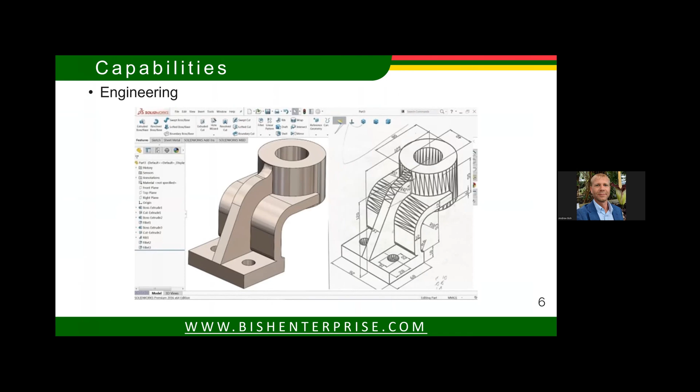We do 3D engineering or 3D design work using SolidWorks, and our engineering team works with that software. A lot of that is done in-house.

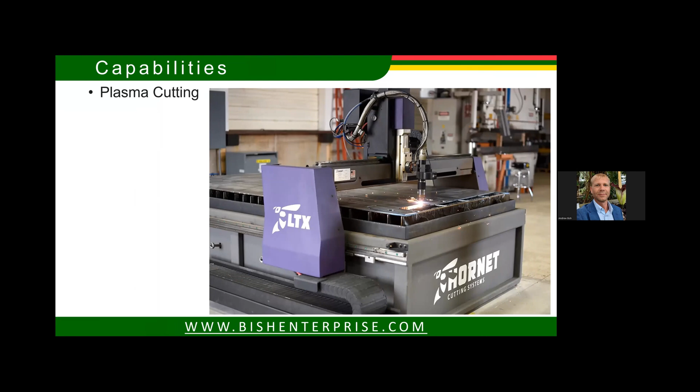We are capable of doing any type of plasma cutting. We've also got local laser cutting services.

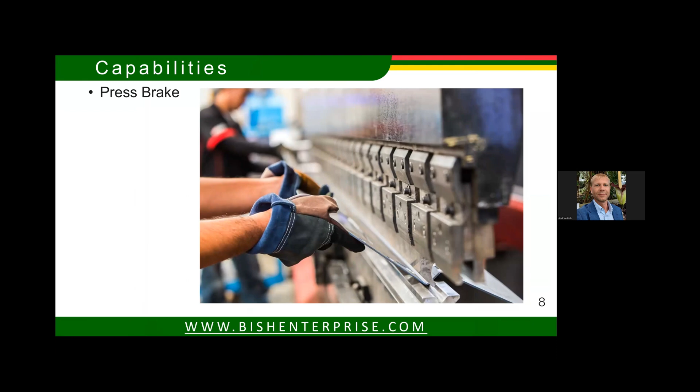We bend our own parts. We work a lot with steel, aluminum, a lot of sheet metal and tubing are our specialties. Agricultural components are oftentimes built with tubing and sheet metal. We have our own team of fabricators and welders and assembly team members.

So what do we do for products? We're most known for our header adapters. I'll show you some of these items here in just a little bit, as well as some of our other products. We'll just get into some videos.

So header adapters, this is really what started our company. My grandfather saw a need out there to reduce the entry cost to farmers wanting to upgrade a combine and not necessarily wanting to upgrade their header. Now I realize that some of this equipment is larger scale than what some of the conversations we're having on this call are, but I think that when we look at what we do as a company, this adaptation is a relatively simple item that helps customers, helps farmers specifically be able to more affordably harvest their crops.

And it does seem like there is, from at least the dialogue we've heard today, some opportunity there. The adapters to me just symbolize our ability to make different components work together. And I think when we're thinking about how do we get different manufacturers and different products that are in the marketplace to play nicely together, we definitely have the ability to source some of that out.

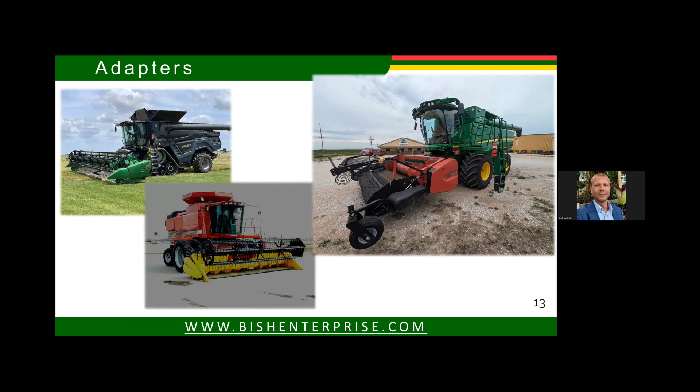Here's some other adapters that we make. So if you ever see, if you're in the United States and you ever happen to see any crop videos where there's different color headers on different combines, we likely made the component for that.

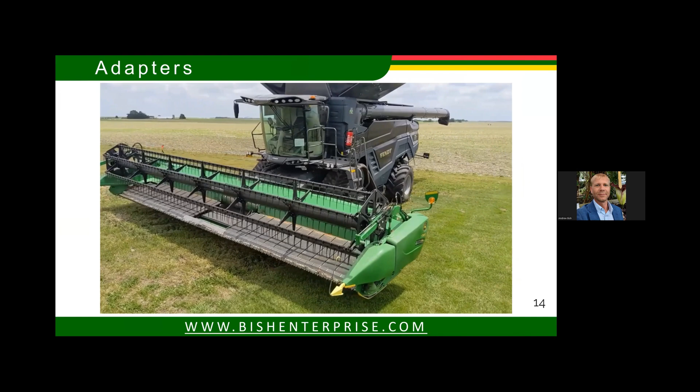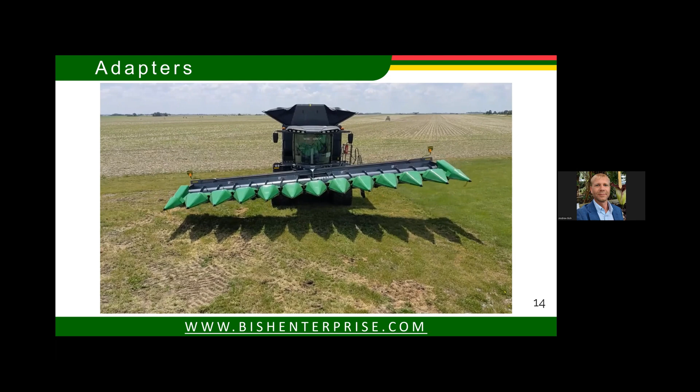Here's just a short video of one of the products that we put together a few years ago for the AGCO Corporation. You can see from the background we are in farm country. There happened to be a sprayer running in the background of that one, the snippet just a minute ago.

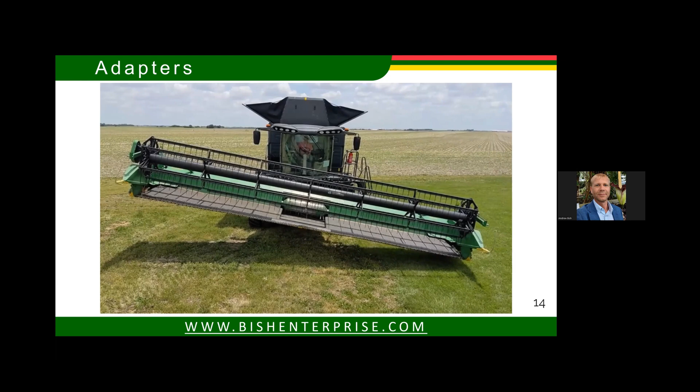So sorghum, this is, I guess, what brought Nate and I together. We happened to develop a specialty header specifically for the harvesting of sorghum. It is called our super crop header.

This header was designed to more efficiently harvest sorghum in some of the drier parts of the United States. A lot of the research that went into this header was done in eastern Colorado and western Kansas, where there are some severe drought conditions that have been ongoing for long periods of time.

One of the challenges we were trying to solve when we developed this particular header for sorghum was that, at least in the United States, a lot of our varieties tend to fall down during the harvest period or before the harvest period and end up on the ground.

We wanted an efficient way to pick the material up without bringing all of the material into the combine, so that we put less workload onto the combine, use less fuel, but also capture that material that would otherwise be lost as a result of the weather situation.

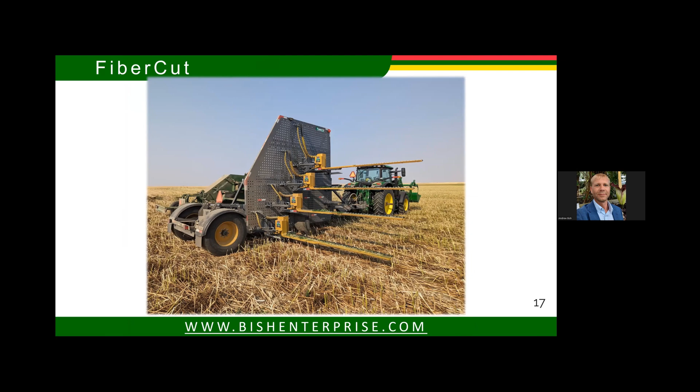This is another product that we innovated, developed out. This was for actually one of our specialty crop customers that works in hemp.

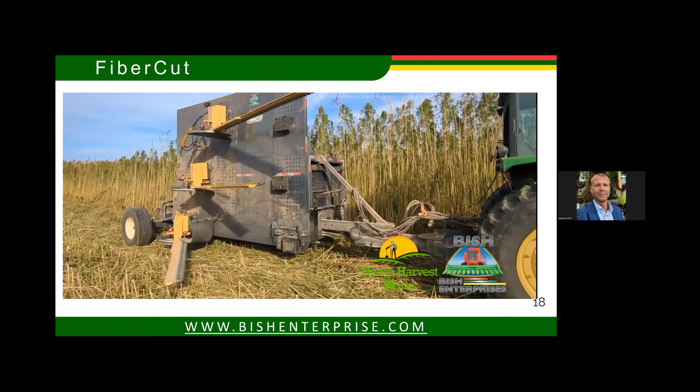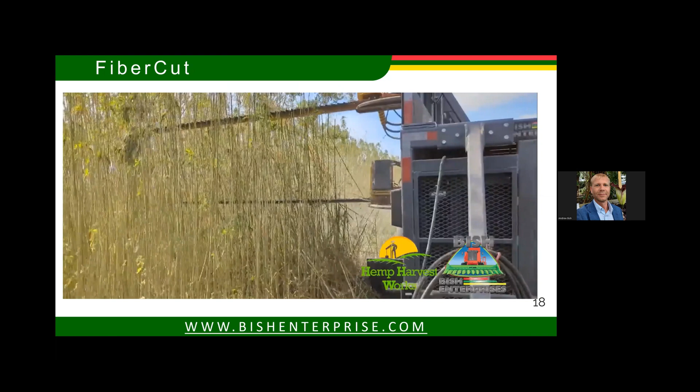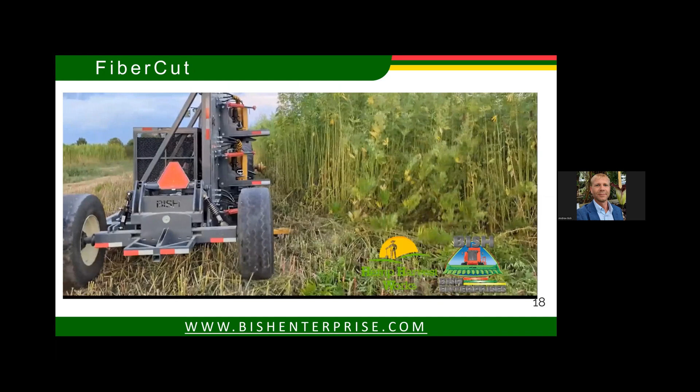We wanted, we were working to identify a way to make it easier for farmers that had traditional raking and baling equipment to be able to cut down the hemp plants, the stalk. These are customers that are harvesting for stalk material. We wanted an easier way for them to be able to rake and bale that using the existing equipment that they already have on site.

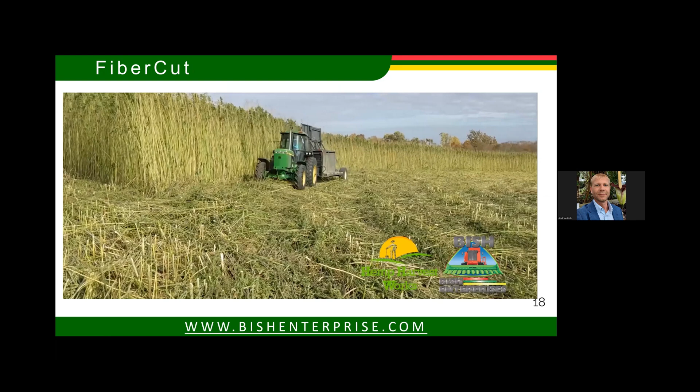So we ended up developing this multi-level sickle mower system. Pretty simple technology, old technology. Sickles have been around for a long period of time. But the way that we configured it allowed it to work for a more efficient harvesting system. So we are very familiar with working not only with new technologies, but older technologies and how to apply those to today's needs.

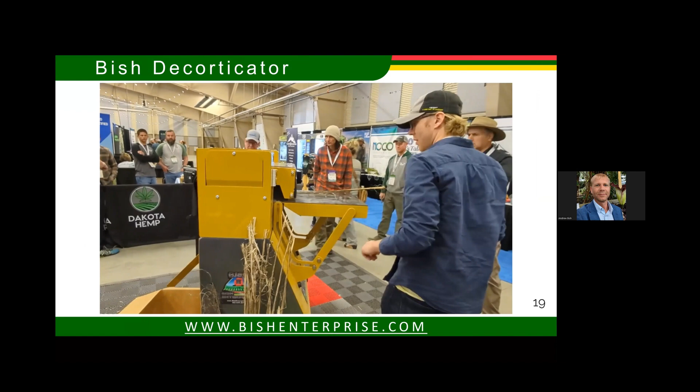This is an example of a smaller scale piece of equipment that we've developed. This is a research scale decortication unit. It actually takes stalks, specifically currently of hemp or kenaf plants, and it can separate out the bast fibers from that stalk material, separating out the hurd or the woody material from those bast fibers.

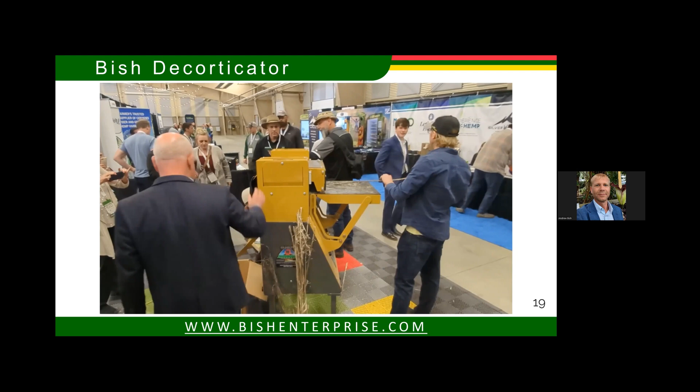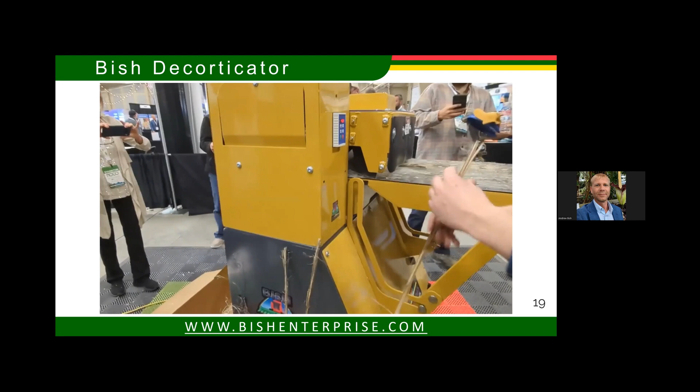This machine was really designed for universities in the United States, where they're doing small scale plots, trying to understand the different ratios of what is inside of the stalk itself.

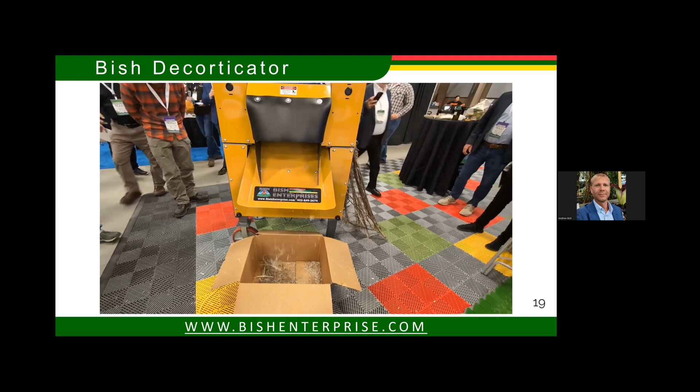A machine like this could easily be used for a small grower as well. That's actually something we're working on right now, modifying the unit to work more efficiently for a smaller grower instead of a university setting. That's just an example of some of the smaller equipment we're fully capable of building, as most of what I've shown before is pretty large scale.

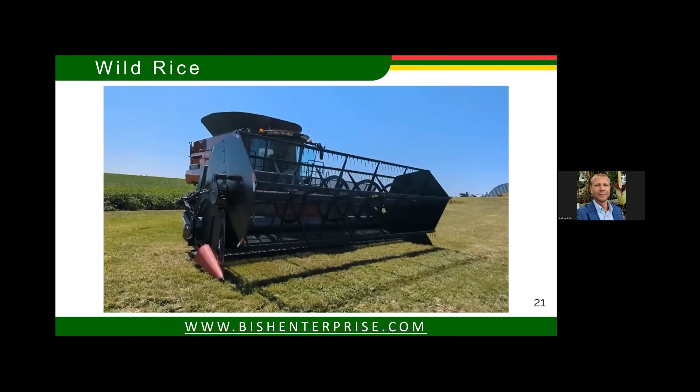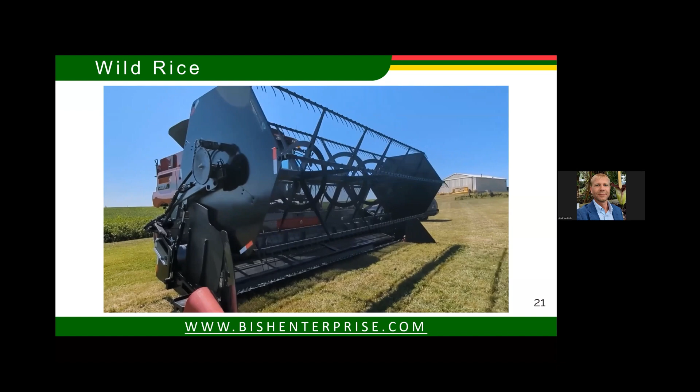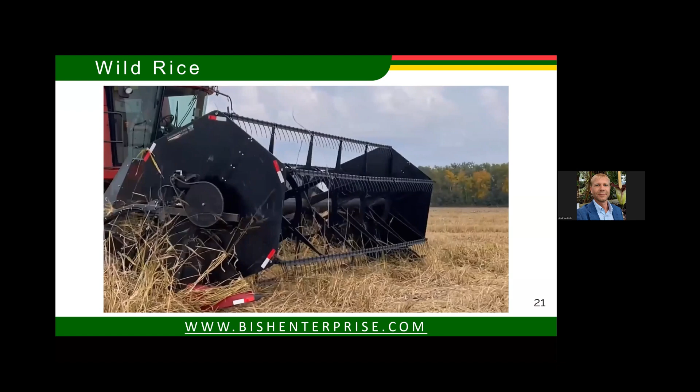This header here was designed for the wild rice industry. We've got another one going into production right now. This is a specially designed header with an extremely large reel, over 100 inches in diameter. There aren't any other headers on the marketplace with such a large reel. We're trying to solve some of the challenges these producers are having when harvesting wild rice.

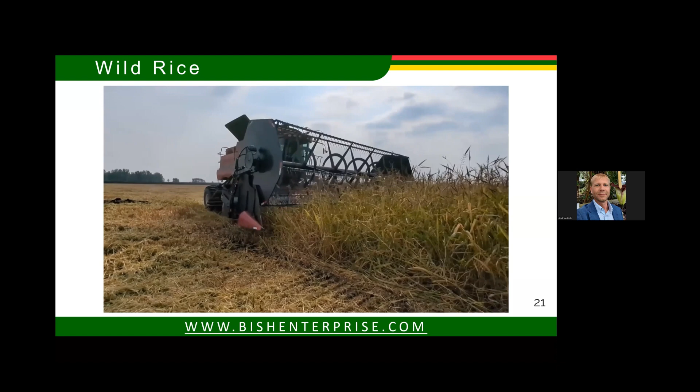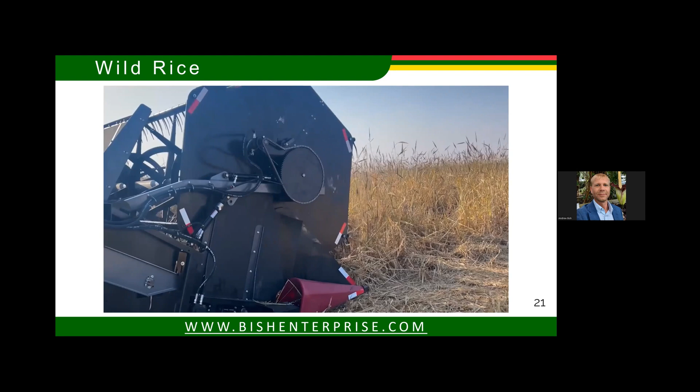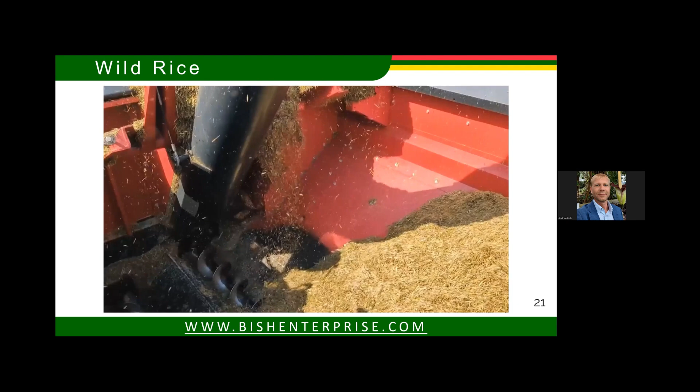Wild rice is also a crop that tends to fall over. About 30 to 40% of the crop is often laying over in the field when the producer harvests it. Wild rice also shatters very easily—it's a wild crop, so they haven't bred shatter resistance into it. The oversized reel allows us to stay above the seed head when harvesting at very low points, reducing the amount of shatter that occurs with that plant.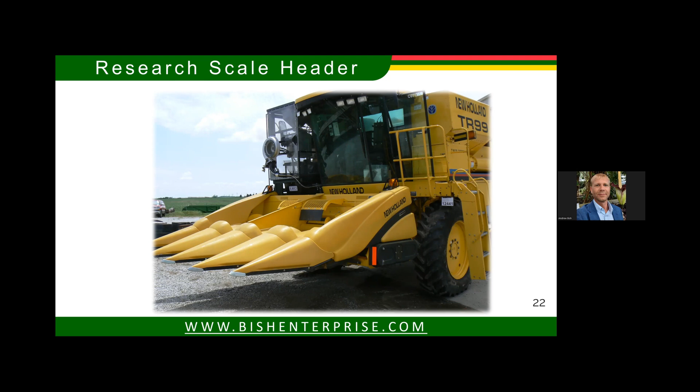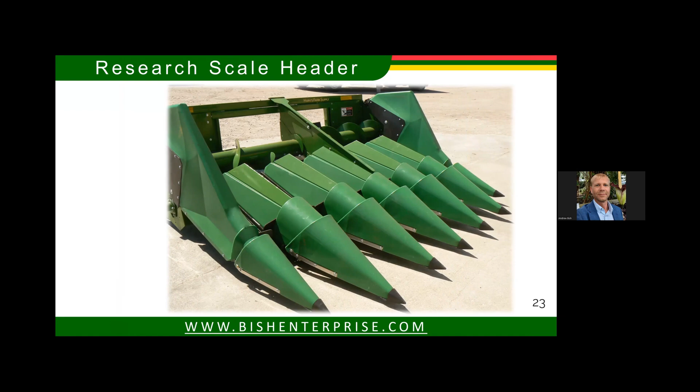When we get into some smaller equipment, we do a lot of work with researchers throughout the United States and seed companies—most of the seed in the world is created by some of these companies, and these lend into some of our smaller headers. So we've got 2, 3, 4, 5-row, and 6-row headers we've designed for this purpose that could potentially work well in locations that have small scale equipment.

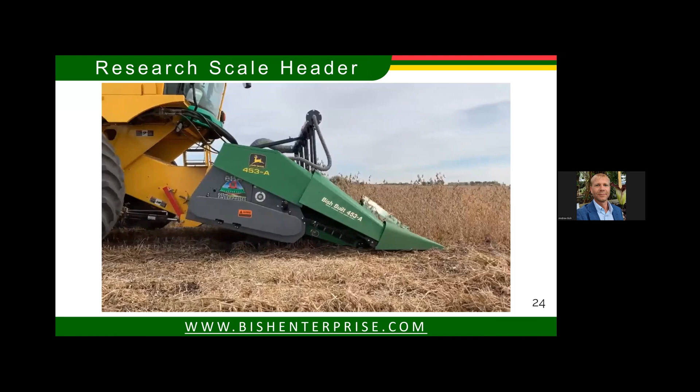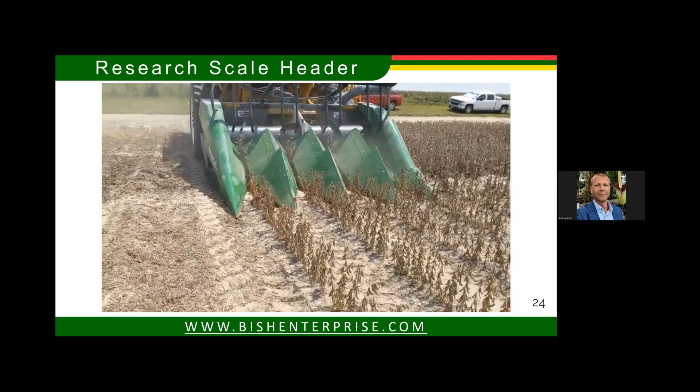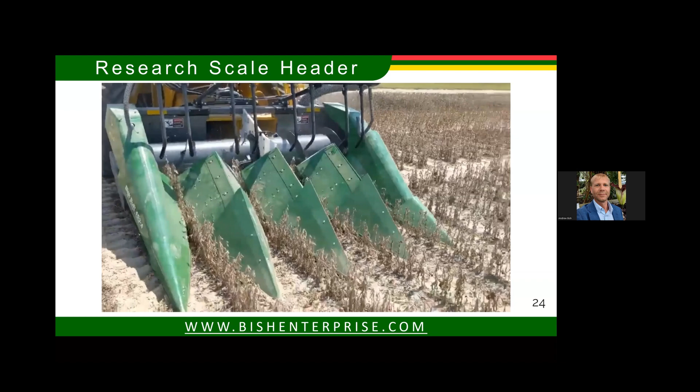Even these videos here, this combine is larger than what we'd be seeing in a lot of areas, but they're just examples of the ability to take large scale equipment and scale it down so it can be used in a smaller setting, while still achieving some of the efficiencies of the larger scale style equipment.

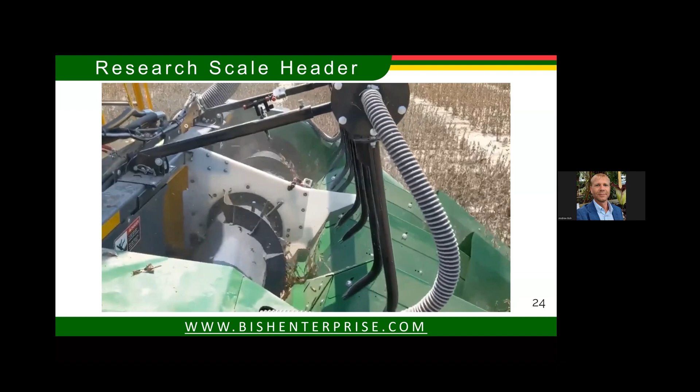Just another example, a small plot combine. These combines you're seeing in the videos are much smaller than what a typical person in the United States would use for production purposes. But I have seen similar sized combines in places like India.

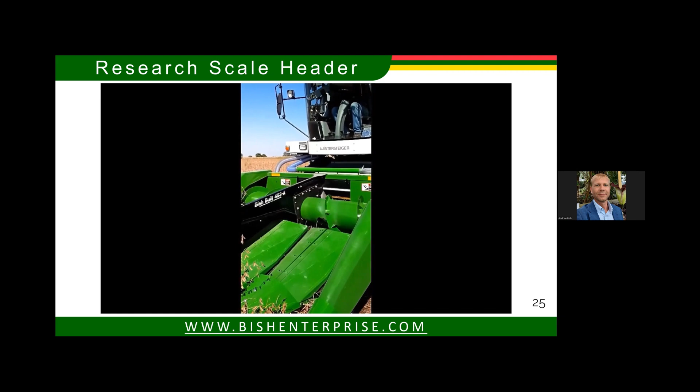And that's a little bit about what we do. So let me stop sharing here, and we'll get back to—let me see if I can show my video now.

While you're doing that, Andrew, looks like we have a couple of questions in the chat, but I also want to make sure we have time for you and Eric to have a healthy interchange. I'm really excited because it sounds like he's doing some really cool things, and I know you're doing some really cool things too. I love putting two engineers together and just sitting back and watching. But before we do that, Michael Snow asked just how far you can scale your work down, and he wanted some clarification on the Wintersteiger combine as far as cost—is it $70,000 or more? If you can address those things, Andrew, then it'll be time to take the pin out of it.

I think that's a great question about what the costs of those machines are, and the reality is a lot of those combines are still out of reach for a lot of producers out there. That Wintersteiger combine right there may very well cost in excess of 150 to 200 thousand dollars or more, depending on how it's set up, and that's definitely not something most people can tolerate. The good news is those combines are very complex in terms of their research capabilities, so there are less expensive combines out there in the marketplace.

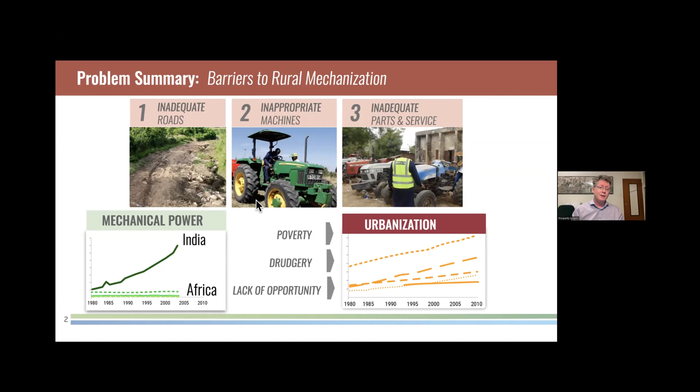There are no roads to the majority of these farm fields, and decades of evidence is showing that there won't be. So there needs to be a solution, and this is why we created the Service Rover Vehicle, or the SRV for short. It tackles the three key things that I mentioned before—it's engineered to be locally built and serviced, which is a big piece of the problem.

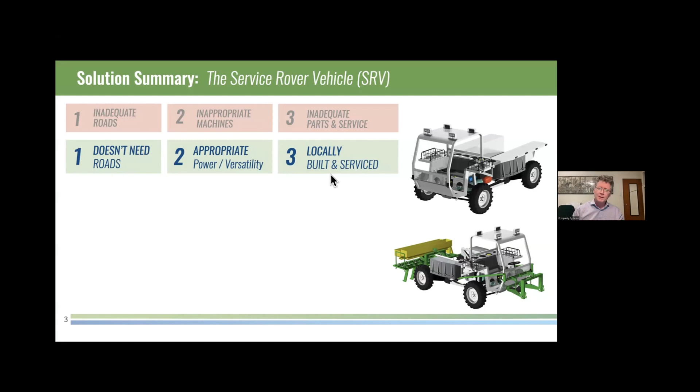So moving forward, I'll look at what my next slide is. The next slide is: what is it, what does it do? Its suspension is derived from the world's first all-terrain supercar. Very unique suspension, nothing like it. And it's patented. So an Africa version of this has been developed.

This distance from here to here is over 7.5 feet, so it doesn't need roads to reach farms. It can operate on twice the incline. It can carry 1.2 tons up a 70% grade.

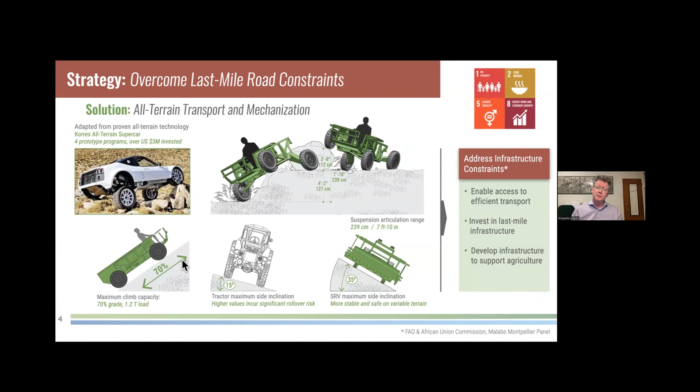This is what it looks like compared to other machines in existence. The Toyota Hilux pickup is everywhere, and the big tractors are in most industrial countries, but they're not in rural farming systems. So what's our solution set?

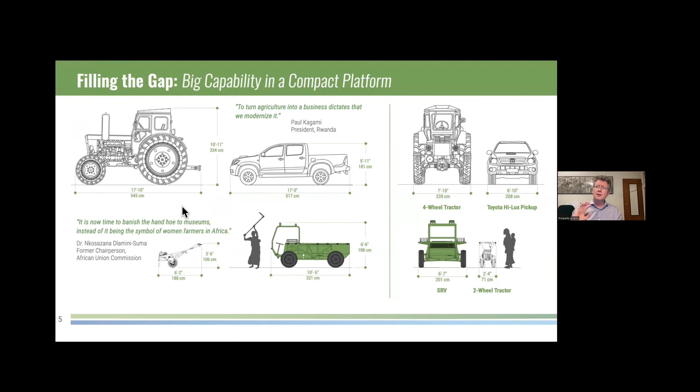It's based on all of the research and the advising experts, and it was years of work to engineer this into the SRV. We had this all put together ourselves, independent of anybody else, outside of all the people we were working with and all the research we were doing. Turns out we had our own list.

And 6 months later, the FAO, the African Union Commission, and the Malabo Montpellier panel report, using the same massive research base that we did and consulting the same experts - a big army versus a handful - this was what they came up with for strategies to mechanize Africa. So it's not like they created a bunch of boxes and we just checked them off. We had our solution set before they released theirs.

We are perfectly aligned with the agendas to mechanize Africa. This is really important. Our business model and how we approach this is plugged into that kind of ecosystem thinking that's going on. So this is how we're looking at doing it.

As I said, the vehicle is engineered to be basically an IKEA furniture kit. It can be built from simple kits and modified containers with low-tech tools, trainable methods - something that women and youth can be trained to do. Anybody that can understand a basic motorcycle, this machine is so simple, can actually train women and youth to operate the machine, to service the machine, and eventually to build it.

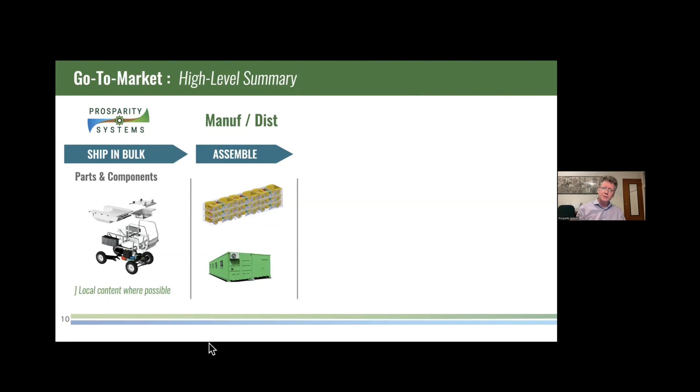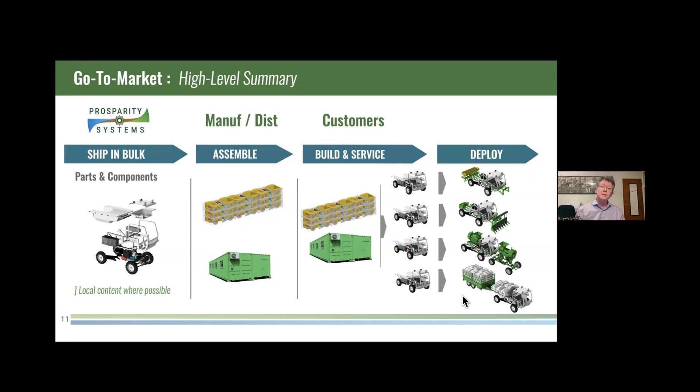They outfit shipping containers to build the kits, they ship the kits and containers to our customers - and we'll get into who our customers are in a minute. Our customers will build and service their own fleet for a machine that allows them to provide the critical, essential mechanization services to the thousands and thousands of farms that they engage for production, and they aggregate and resell that crop. So that's kind of the customer in a nutshell.

Why would we do it this way? Because it is in perfect alignment with these strategies for mechanizing Africa. It brings light manufacturing into Africa - this is a huge development goal with the countries and their donor countries. It distributes these critical, low investment machines, facilities, tools, and opportunities into these rural regions where they're needed most.

This is spatial synchronization of development activity, which is another huge development objective. So in this case, that spatial synchronization is assembly, build, service, jobs, training, education, and related infrastructure. And this is intentionally engineered so that women and youth can operate, service, and build it.

Now, when a crop reaches a road, if the road is degraded, which it usually is, the big trucks aren't coming either. And micro-entrepreneurs with consumer vehicles are hauling the crop.

So what you're looking at is first mile transport for most of rural Africa. It's slow, expensive, unreliable. In the case of fresh vegetables, it damages crop, and the SRV can disrupt this.

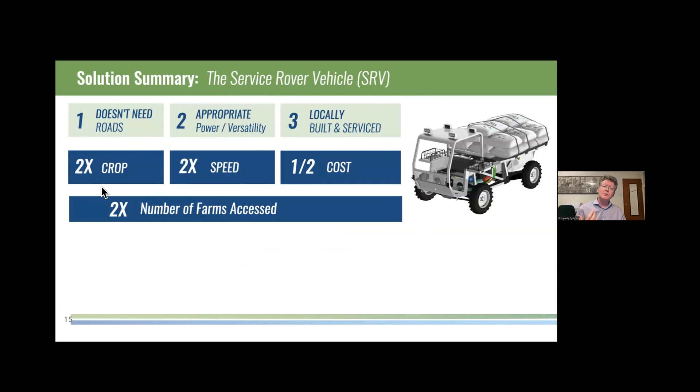Okay, so moving along, what are the advantages compared to what you just saw? It can haul twice the crop at twice the speed for half the cost, and double the number of farms that these businesses can access. Hauling crop is only one of 6 revenue streams possible with the vehicle.

So they talked about being able to bundle your solutions in a way that works for local context. The vehicle is simply a platform that overcomes the largest hurdle, which is the roads and lack of roads. And then it can simply be configured as needed with these very compact Category 1 low horsepower implements.

Why would you go in with such a small implement? Because you're going down trails, down unimproved tracks. You need something that's very small and compact. So with these kind of compact implements, a machine like this can go farm to farm in roadless areas.

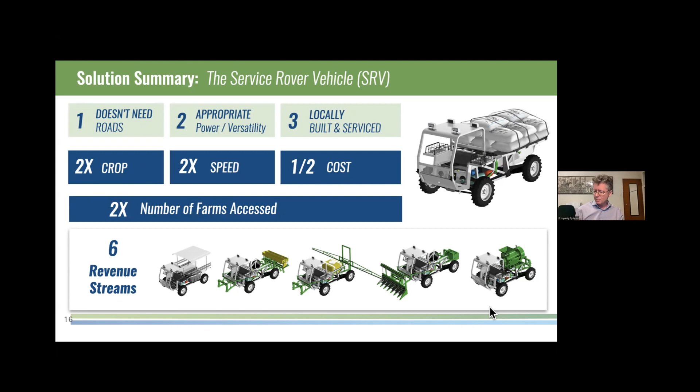Another problem we talked about that I heard everyone talking about was post-harvest processing. So here you have part of the ecosystem. Cold Hubs has solar-powered cold storage for fresh vegetables. They've scaled 60 facilities across 28 states in Nigeria that feed over 90 million people. They're losing 30% of the crop because of these transport issues before it even gets there.

Let's assume they've solved the transport part and they're already building and servicing fleets of our vehicle. They have many farms producing grains, and those farms are requesting in-field post-harvest processing. One of the problems is even with a small thresher like this, transport is a massive problem. So you say you have the right machine, but how are you going to logistically get it from farm to farm in these roadless areas?

You're going to spend all of your time moving the machine and a tiny fraction actually making revenue. A machine like Soybean Innovation Lab's multi-crop thresher, it's a big thresher, but it can fit in the back of our vehicle. It's engineered for these kind of machines, and it can be powered off the rear PTO.

We have a front PTO, we have a side PTO, so we can power 2 of these machines. And with our machine, this kind of processing equipment can go anywhere.

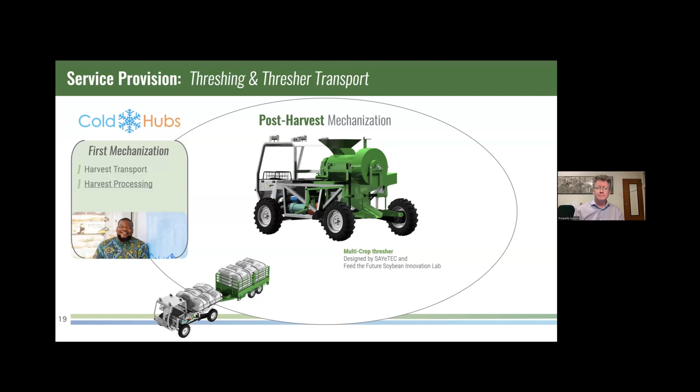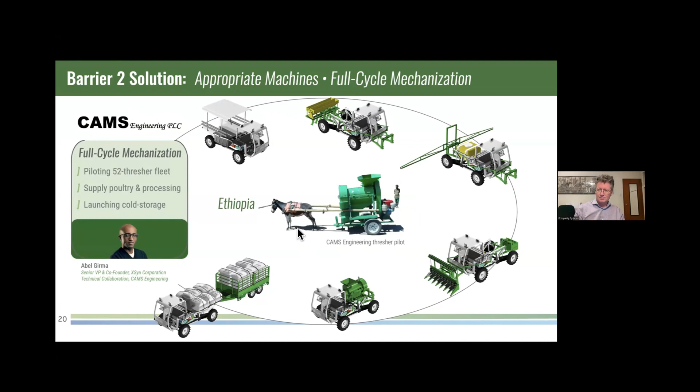All right, moving along, our value proposition, if you look at this as an umbrella idea, is we enable agricultural economic productivity without having to build or rehabilitate roads. Based on years of research and talking to the experts, talking to road agencies, I talked to the Tanzania Road Fund Board. This is disruptive, and the implications of it are significant and far-reaching.

So moving along, business model: how do we even implement this? We sell the supplies, rights, and support to build and service the SRV to African businesses who buy and resell crop. These businesses are scaling, almost doubling year over year, and scaling into a market of over 30 million small-scale farms. There's many examples of them.

Cold Hubs isn't even on here, these are just a few samples. But these businesses are having huge issues with upstream logistics that generate compounding costs and losses along the entire value chain.

So a lot of these potential customers want to vertically integrate operations. We talked about a project that's actually trying to do that vertical integration. Why? Because you have a lot of informal actors doing these very inefficient functions using inadequate technologies. If you can vertically integrate, the money you're able to save gives plenty of rationale to build and service your own fleets.

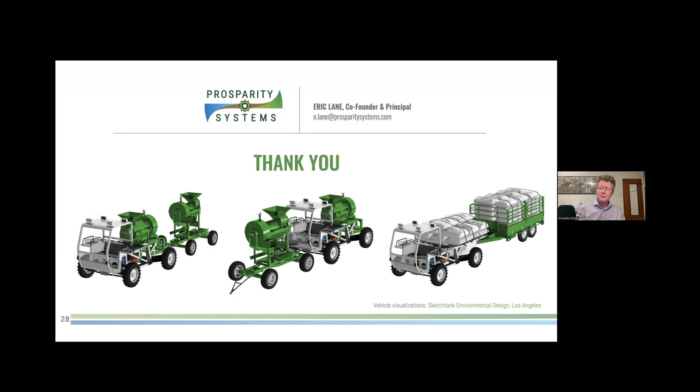So that's the near future, and we have a long-term roadmap available. That's basically everything in a nutshell. I'm happy to cover other stuff. I'll look at the team just so you can understand who was involved in this.

I did strategy and research for the consumer version of this hyper-efficient vehicle. It won a global competition and it's in the Henry Ford Museum. I co-founded it with Ron Mathis. He designed that vehicle, he designed world championship race cars, and he led engineering for this Space Plane project. So when I say the project, we've leveraged world-class engineering. We're not kidding when I say that.

Ron was about to start technical drawings when he was killed in an accident, and most of his work died with him. I had to find my way back from that, and the way back was our current partner, Korres Engineering in Athens, Greece. Before partnering with us, they developed the enabling technology across 4 prototype programs. So Korres Engineering has the team, facilities, and experience to execute the innovation. They've already done it with far more complex machines.

If I were to look at some other stuff, there's the economics, and this is some of the engineering if you're into that. I'm not an engineer, it just happens that world-class engineers like me for some reason.

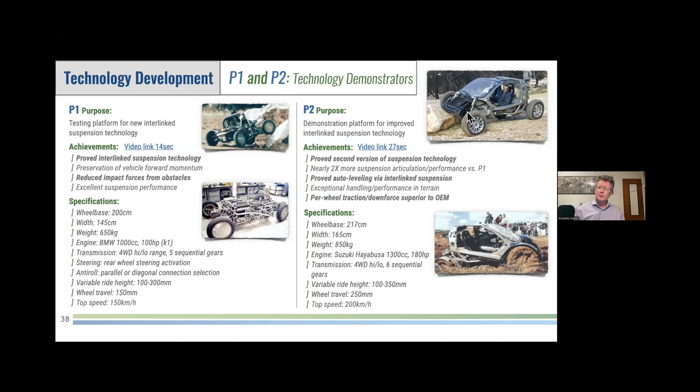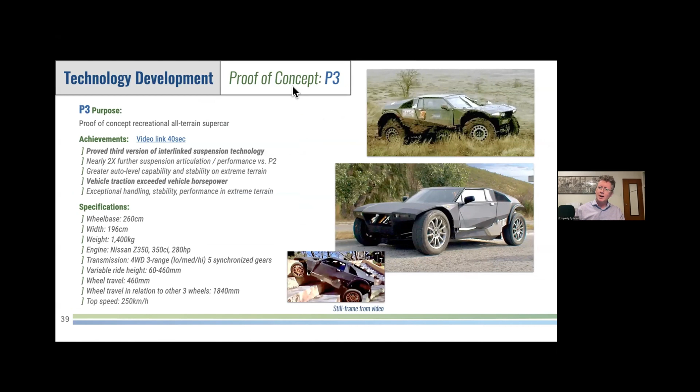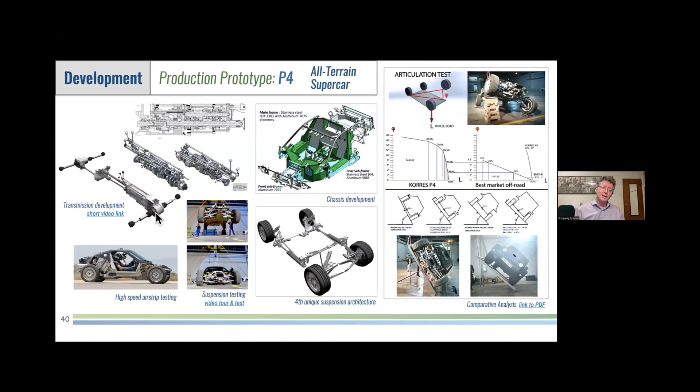So there were already 2 technology demonstrators, and then Korres Engineering was going after a recreational vehicle with their technology. Long story short: prototype, proof of concept, then they went into the production prototype of an all-terrain supercar. You can look at the extent of this engineering, it will melt your brain. The transmission is 3 stages, 18 forward gears, and it fits in a tiny compact space, all designed in-house. Incredible engineering, and the culmination of all that was the all-terrain supercar.

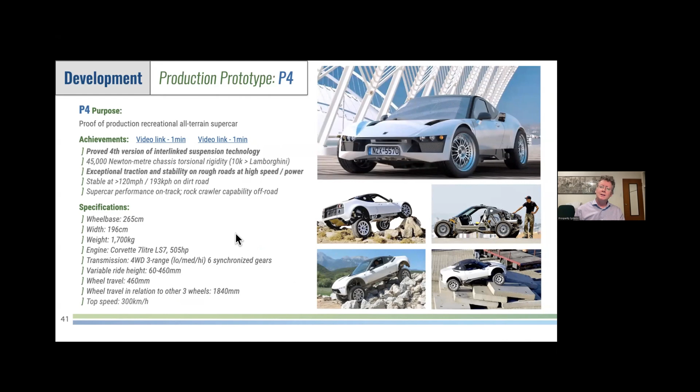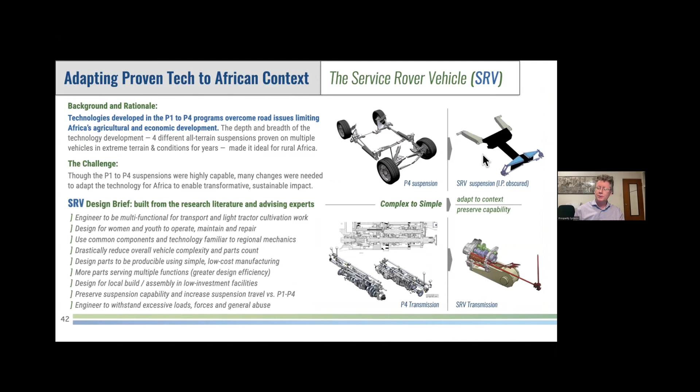The question was, this technology overcomes some of the largest constraints holding back agriculture in Africa. How do we adapt it to African context? This was a huge engineering undertaking, going from super complex to super simple with just a handful of parts. That's kind of the road, that's where we've been, and I hope that's useful information.

Wow, wow, I'm blown away. And I think I see that a couple of other folks are too. I know Elcano and Sergio both have questions and comments.

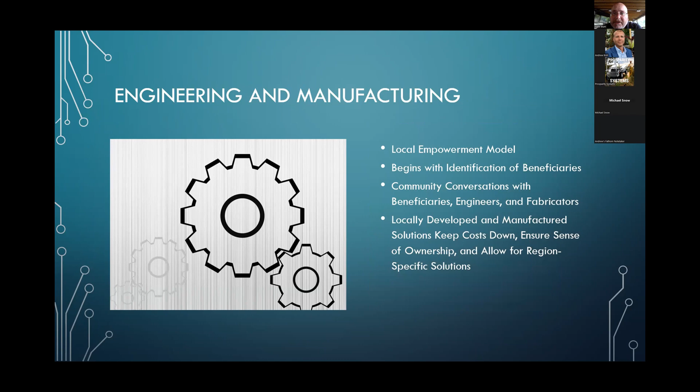And then again, we're talking about local empowerment. I really think we need to be involving local professionals, fabricators, et cetera, as often as we can to keep costs down, but also to empower and encourage innovations, because there are always going to be things that need to be done on the ground, or that could be made better, that we may not be able to see from a bit of a distance.

As far as ownership goes, I really love the model where a cooperative, farmer producer organization, or SACCO owns these and is able to cost share. But that also means they're going to have to consider some sort of fee for members to go into a maintenance fund, which has to have some oversight as well so it doesn't become embezzled or something. Because when something breaks, you're going to have to be able to fix it. And if you can't afford to fix it, it's not going to get fixed. And if you don't have people trained properly to fix it, that's a whole other problem.

We also need to make sure we're engaging all of our stakeholders, in Africa in particular, where you have women doing the agricultural work but not being involved in the decision-making. That's a real problem, and it's not just a problem from a gender equity standpoint. It's a problem because they're the ones that understand what they need on the ground. If they're out there in the field doing the work but not being allowed to be at the table when decisions are made, it's highly unlikely those decisions are going to be optimal.

So again, stakeholders also include local processors and aggregators. We've talked with a couple of aggregators today. They've got a stake in making sure these systems work as well, so bringing them to the table. And then, who's going to own the project? Who are the beneficiaries? Is it the entire community, or part of a community? Who's it going to be? Identifying those people and getting them involved is very important.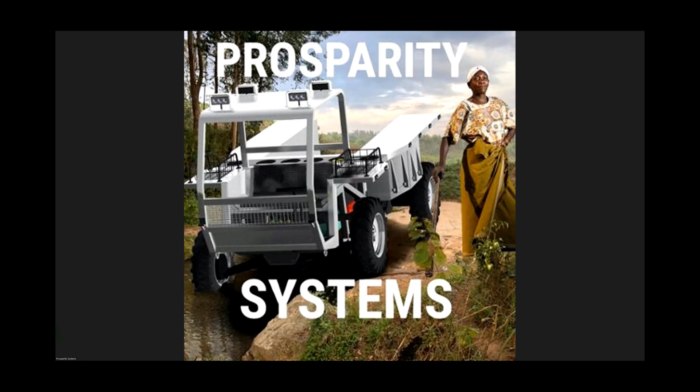Yeah, the ground clearance, I would say it's probably around 14 inches. It might be significantly higher because the differential is not located between the rear wheels, it's located more centrally in the machine, with very long trailing arms going out to the rear wheels. And I think a lot of the secret is about how you navigate around obstacles without getting stuck. So that's part of it as well.

And that really boils down to what's the articulation range, and can you actually sustain traction through the articulation range. So I'm not sure if they're talking about clearance in terms of wanting this to be a sprayer, 3 feet high to get over the plants—it's not going to do that. But if you're talking about clearance in terms of overcoming poor and damaged roads, this is fully capable. What's really interesting about the suspension is you don't need massive clearance to achieve that. You need massive articulation with full weight on each wheel, which maximizes your traction. So it's that combination of articulation and traction which is really the key to overcoming the road constraint. I hope that helps. It does.